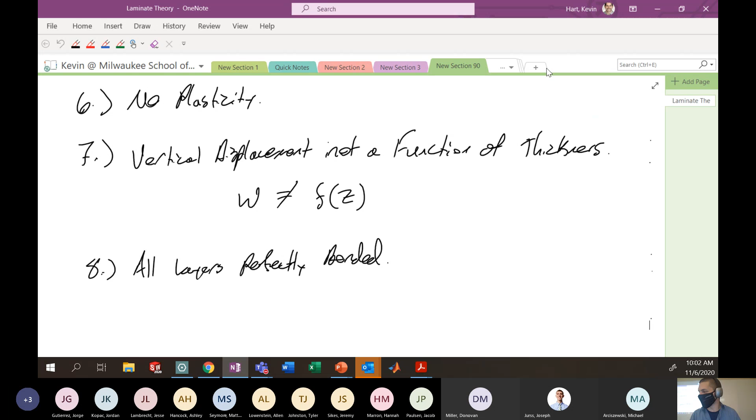No plasticity. No, just kidding. Different class. All right. So we were talking about fatigue and endurance curves. But before I get into that, I want to talk about the lab you just turned in very quickly. So quickly, an aside.

Okay. And this is from the non-circular torsion lab. All right. So your non-circular torsion lab, you should have seen that when you're doing the calculations for this sort of like rectangular cross section, we know from the non-circular torsion portion of the class that shear stresses will be highest in the cross section of bar at like these general locations. All right. So in these particular spots, you'll have like the maximum shear stress. You should have seen that like the error for the modulus calculation on this side of the bar that you had like some high error. I think it was like 28% was approximately the right number. All right. On this side of the bar, your error was lower. It was like 3% or something like that.

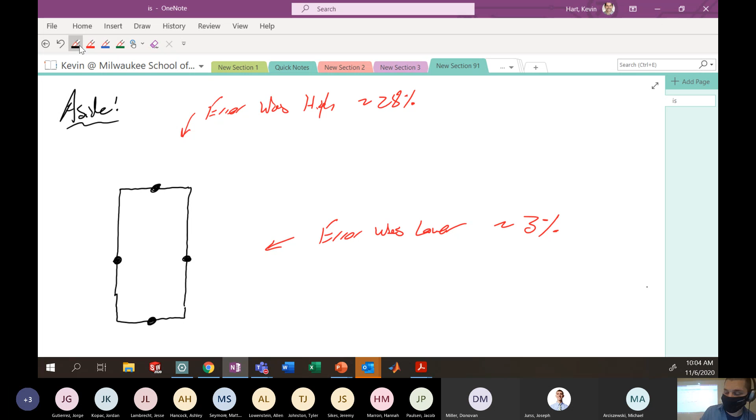Okay, approximately. When you're calculating the moduli for your lab. Now, we know from our lecture of non-circular members and torsion that we're going to have like the max shear stress sort of on this like center of like the long sides, the center of these like sides of the bar. We also know that at like the edges here, these corners, your shear stress is equal to 0. All right, for all these 4 corners. Okay, so the question is, why was the error so high on the short side, but the error was so low on the long side? I had a lot of very interesting responses, most of them incorrect. Okay, so let me explain why that would be.

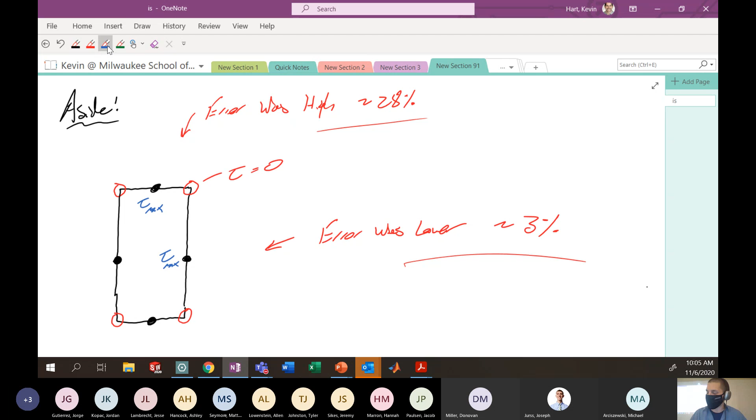All right, so if we think about what the distribution of the shear stress might look like on these sides of the bar, it's going to look something like this, where if you have some maximum value that's like up here, it's going to sort of taper off to the edge. It looks sort of something like this. Okay, that's going to be what your distribution generally looks like. Same thing on the long side of the bar. All right, it's kind of coming up like this, and that's not a very good drawing. That's a little bit more appropriate. All right, where it looks something like that. This is your distribution of the shear on either side of the bar as you're looking at the bar. The question was, why is the error so high on this top side of the bar? And many people came up with ideas, but most of the ideas were sus, as they say.

What is it? Among Us. Yeah, okay. Very sus. All right, it's like they're stealing my word. Very sus. All right, suspicious.

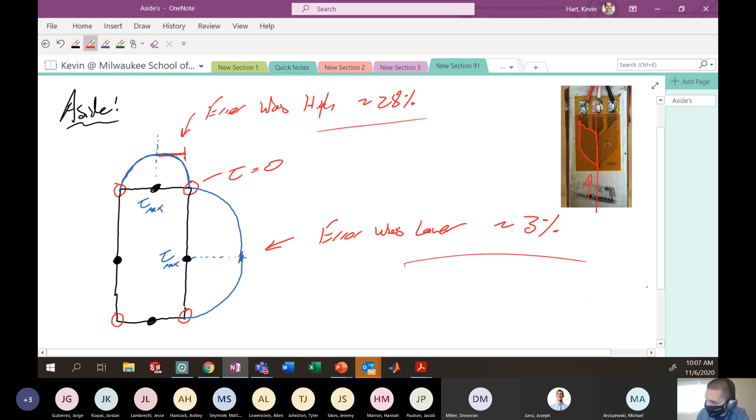All right. So when I think about this particular picture, let's see if I can bring this in here. Is it going to blow everything up? No, it's not blowing everything up. What I'm saying here is that this gauge is occupying so much real estate on this particular side of the bar. So what do I mean by that? Well, I'm basically measuring the shear strain over this whole region of the bar. Same thing, I'm measuring the shear strain over this whole region of the bar. On the longer side, I have a similar idea, except it's much less of the total length of the cross section. So here's the general idea.

When I'm measuring with this shear T rosette on the top side of the bar, I'm basically taking the average of this portion of the distribution and the average of this portion of the distribution, and that's basically the shear stress that I'm reading. We see here that because the gauges have such a wide width, the real value of the shear strain on the far edge of that gauge is relatively small. Maybe it's only 50% of the maximum value. Same thing on this side over here. It's maybe only 50% of the maximum value.

So I'm trying to measure the shear at the center of this particular bar, or I've assumed that I know what the shear stress is at the center of the bar with this calculation, tau max. But because of the width of this strain gauge, I'm actually measuring significantly less strain at that point than I would expect. So generally, I might get some portion of my strain reading that is significantly less than what is actually happening at the center. That's different from the long side of the bar where, yeah, I'm measuring some amount, but generally that amount is equal to the maximum. That's just because these shear T's take up so much width on the top side of the bar.

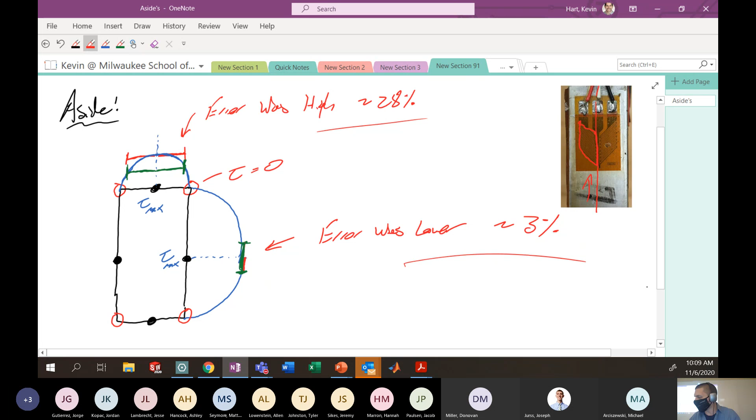And so the explanation here for why the error is so high at the top has something to do with the measurement that we're taking of the shear strain on the top side of the bar. The distribution of the strain on the top side of the bar is such that because of this displacement of the gauge off the center, we have a significant error because of its displacement off of the center of the top of the bar. It's amplified on the top side of the bar as opposed to the long side of the bar, because the amount that the gauge is displaced off of the center, percentage-wise, on the long side of the bar is much less. So hopefully we see and understand that.

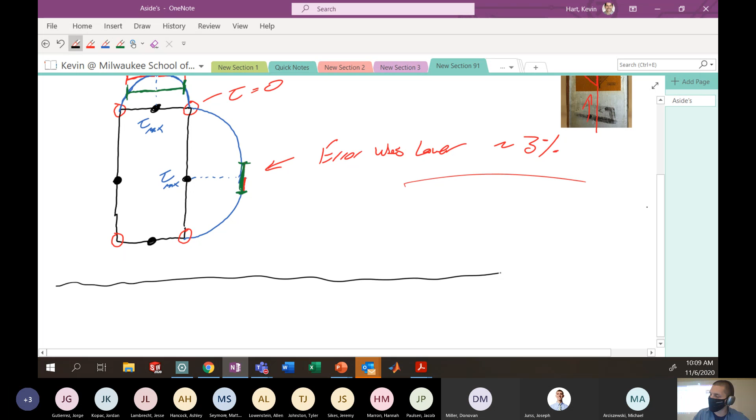That was the correct explanation. Some people were dancing around that idea, but you had to say something like the distance the gauge is displaced from the center of the side is significantly more on the top than it is on the side. That was more or less the right explanation. Okay, rant over. Let's get back to fatigue.

Are you fatigued by my explanation? Okay. What's that? He's enlightened. Oh, that's good. I'm glad he's enlightened and he's not fatigued. But let's get back to fatigue, and I hope you're not fatigued by it.

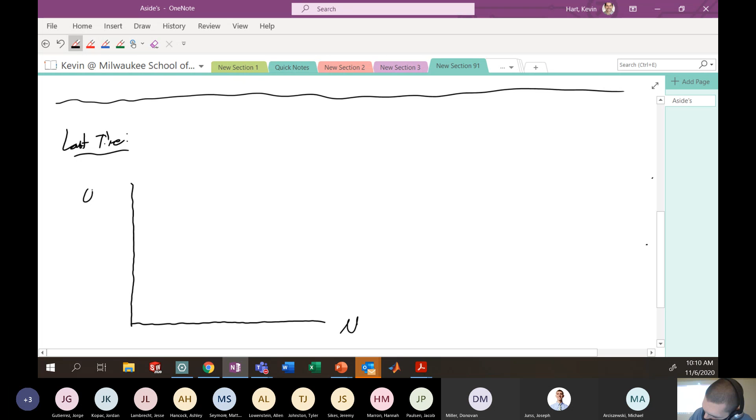Okay. The last time we were talking about endurance curves and modifications to the endurance limit. So last time we were talking about endurance curves, which more or less is plotting on the y-axis. This is an endurance curve.

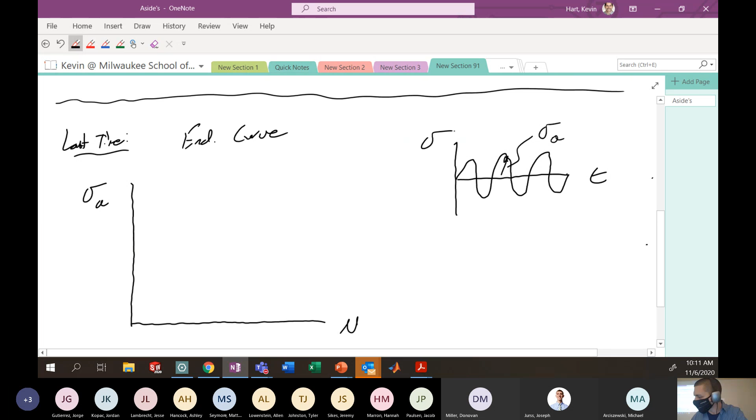The stress amplitude that we can handle. Reminder, this is sort of like the time, and here's our stress distribution that we're assuming. Just a reminder that your stress amplitude is this value, assuming the cyclic distribution.

We're varying the stress amplitude and saying how many cycles to failure do we expect. If we're failing with 0 cycles, we're at the ultimate tensile strength, SUT. Some portion below that, we have the yield stress, which we're calling in fatigue SY. And then there's some low value of the stress amplitude, which we're calling SE, the endurance limit. The idea is that as we lower the stress applied to our piece, we get more and more cycles to failure. It looks something like this in general.

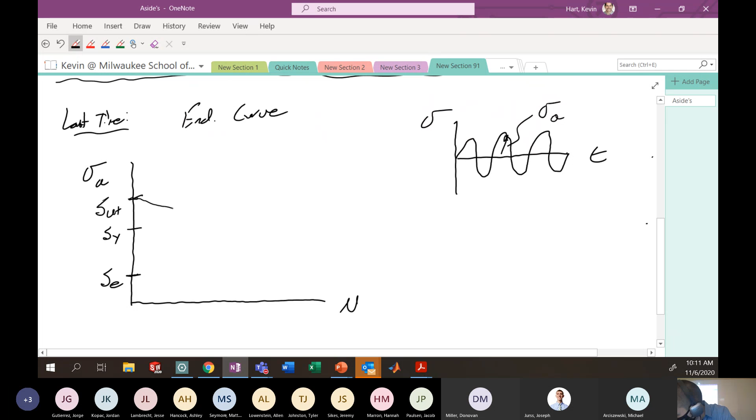This is called our endurance limit, usually around 1 million or 10 million cycles. The idea is this endurance limit, SE, is the stress that you could theoretically apply to the piece infinitely many times and it would never fail.

So if we're designing a piece and want it to quote unquote never fail in fatigue, this would be our design criteria. We'd want to design towards this endurance limit if we're expecting unlimited or infinite cycles applied to our piece. This particular curve is made for a variety of materials, and it looks different for each material.

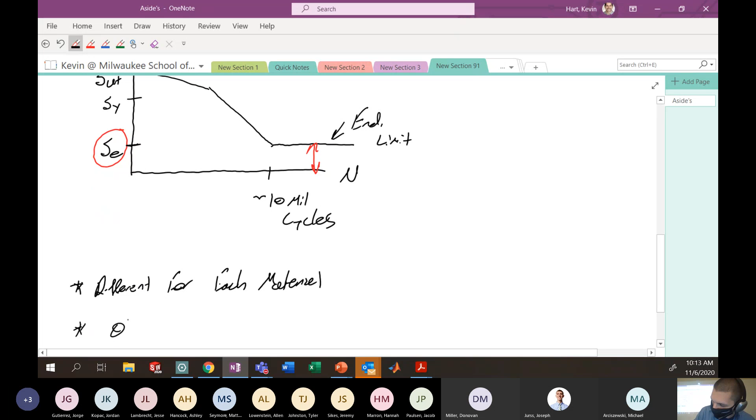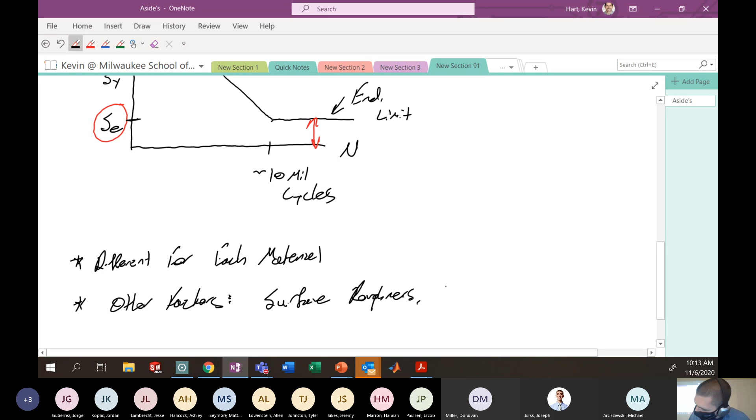Not only is it different for each material, there are other things that can affect how this curve takes shape, such as surface roughness, surface area to volume ratio, and applied load—could be axial fatigue, bending fatigue, or torsional fatigue. So the applied load matters, surface roughness matters, surface area to volume ratio matters, maybe temperature matters. All these things can affect what this curve looks like.

Maybe this is your curve for a pristine specimen, but what if the temperature is 100 degrees Celsius less? Well, maybe your curve looks something like this. Who knows? So now if you're operating at a lower temperature, you have some new endurance limit, which is some SE modified.

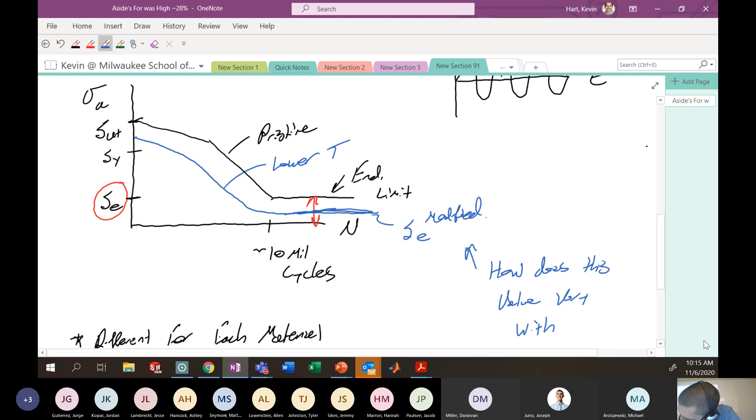Some modified endurance limit that you now want to protect against. So what we want to do over the next lecture is say: if we're operating at a different temperature, a different surface roughness, a different size specimen, or a different loading type, how does that affect our endurance limit? How does this value vary with all of these parameters—surface roughness, surface area to volume ratio, applied load, and temperature? That's what we're going to talk about in this lecture.

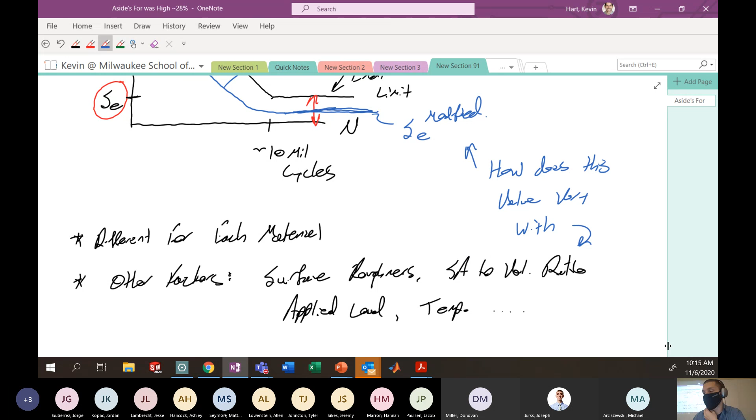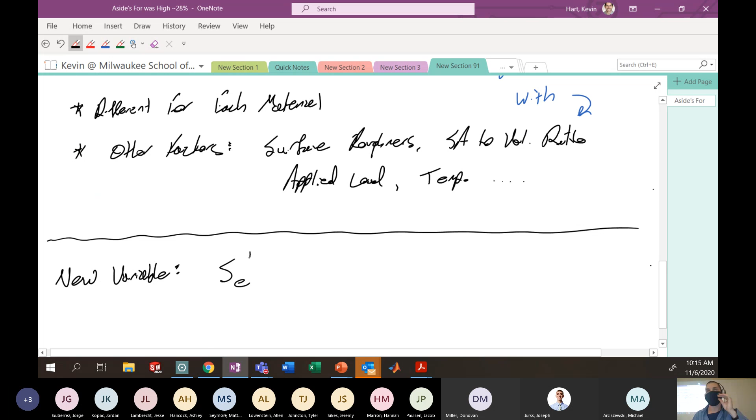So we'll introduce a new variable here: SE prime. SE prime is the pristine endurance limit. What I mean by that is the value that you get from the R.R. Moore high-speed test.

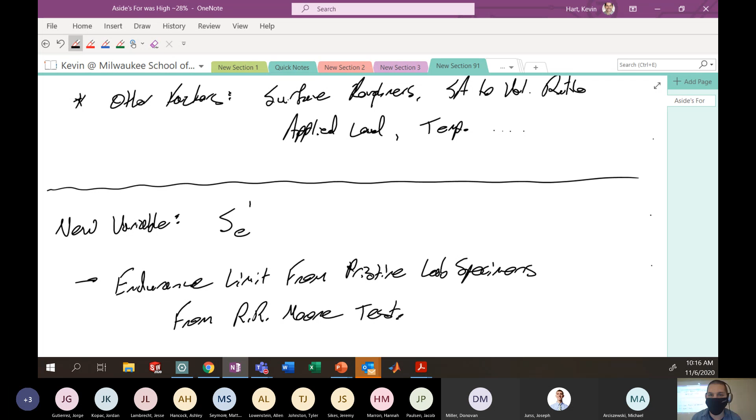This is a very standardized test that must be done to establish what is this pristine baseline. All the samples that have this pristine value coming off are the same size, they have the same surface roughness, they have the same character of applied load. Everything about the pristine endurance limit is very controlled.

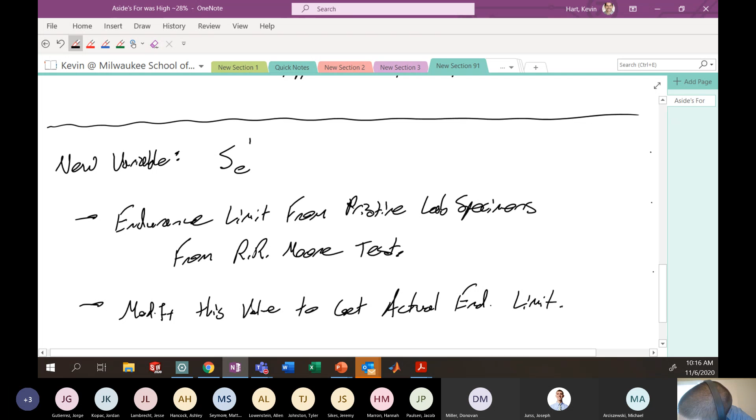Then we modify this pristine limit for our certain situation based on temperature, size, applied load, etc., to get what our actual endurance limit is. We do that using endurance limit modification factors.

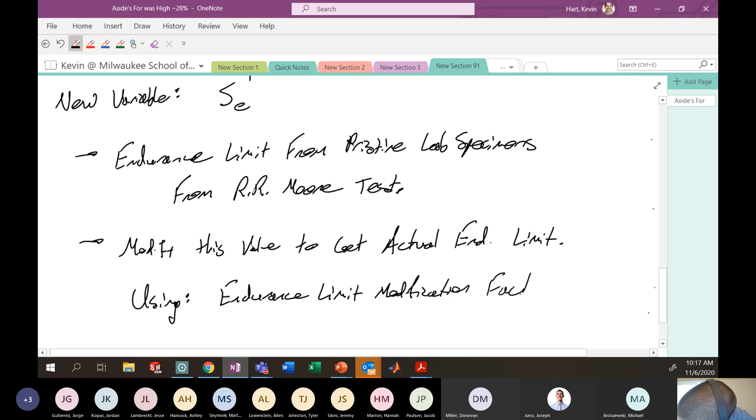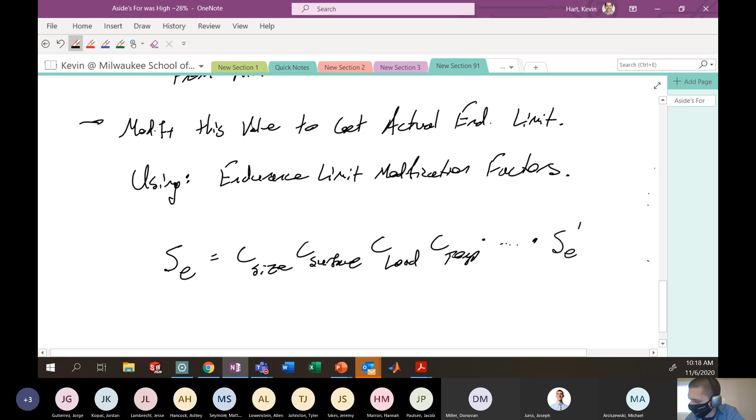The basic equation you'll see for endurance limit modification factors is something like the following: SE, your actual endurance limit given your particular situation, is given by C size times C surface times C load times C temp, times whatever other variables might affect your situation, multiplied by the pristine endurance limit. So this is your actual endurance limit, these are your modifying factors, and this is your pristine endurance limit.

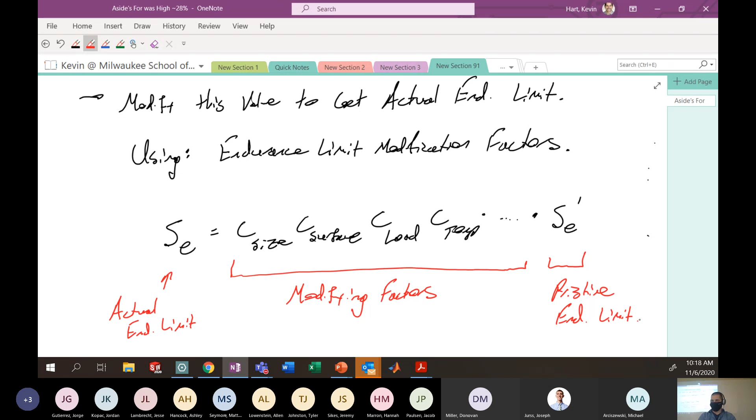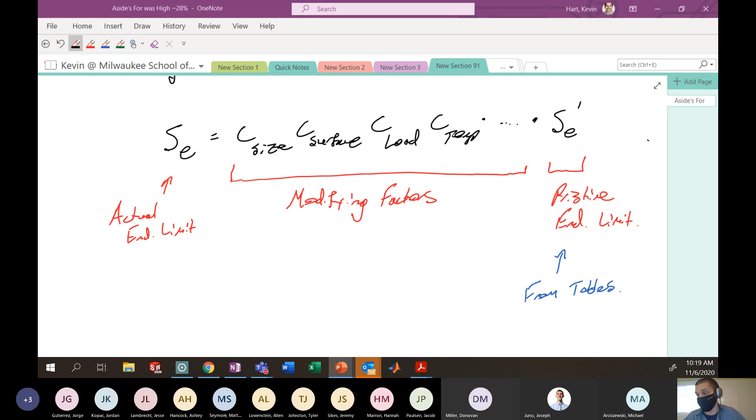So let's actually talk about what these endurance modification factors are. All of these modifying factors come from experiment—they all derive from empirical methods.

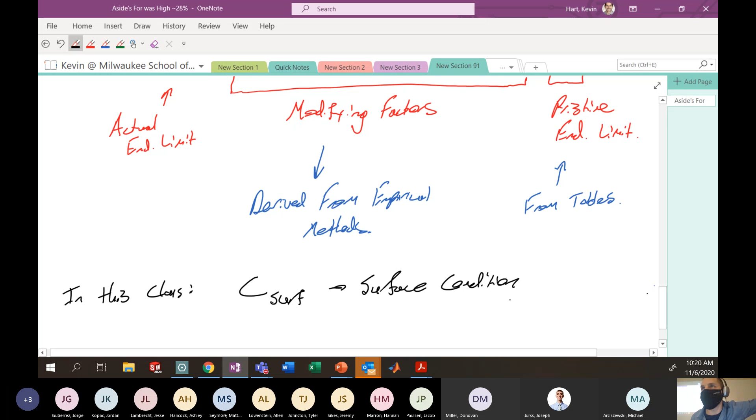Okay, the only ones we're going to talk about in this class are surface condition modification. So CSURF, which is surface condition. The rougher the surface is, the lower the endurance limit will be, just because you have more flaws from which to propagate cracks.

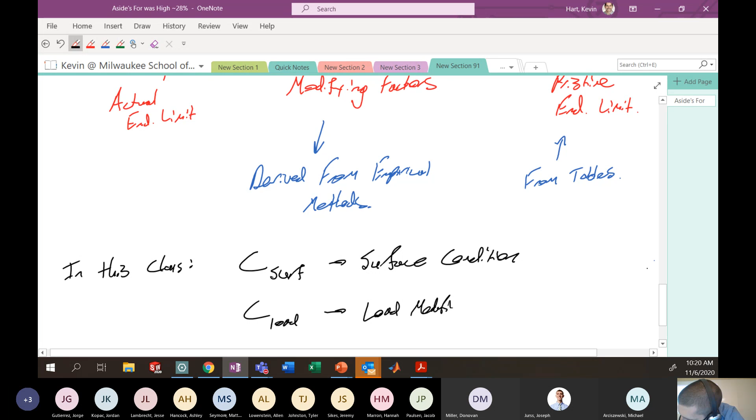We're going to talk about load modification, so this is C load. This basically is a factor that tells you how things change, whether you're doing a tensile loading, a bending loading, or a torsional loading.

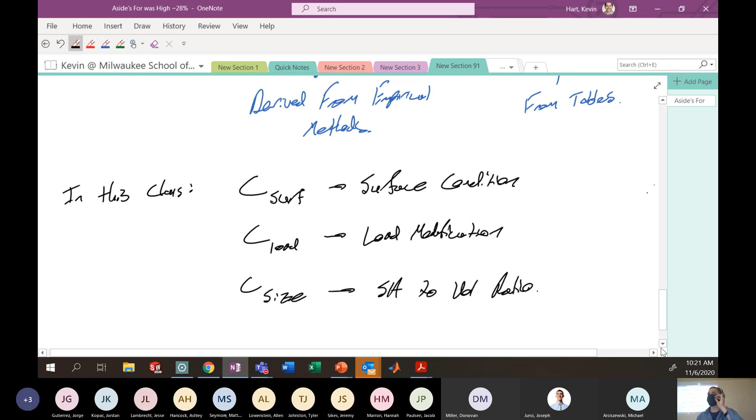The last one that we're going to talk about — not temperature, that one's really quite complicated — is the size modification. And this really has to do with the surface area to volume ratio. The more surface area you have to volume ratio, the higher your likelihood for flaws to affect the ultimate performance.

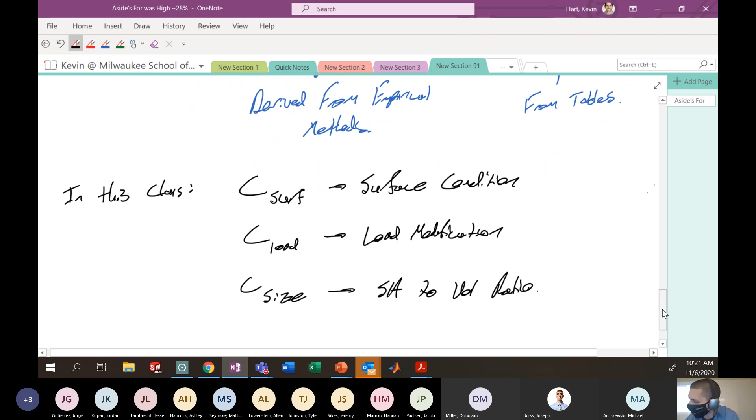If you have a very high volume and a very low surface, that means most of the load is going to be carried by that internal volume, and your proclivity to have flaws that propagate cracks on the surface is very low. But the more surface area you have, the more possibility there is for a flaw to exist, which limits your ultimate performance. That's the idea.

So there are analytical models for each of these, and we're going to tackle them one by one. The first one we want to do is surface modification.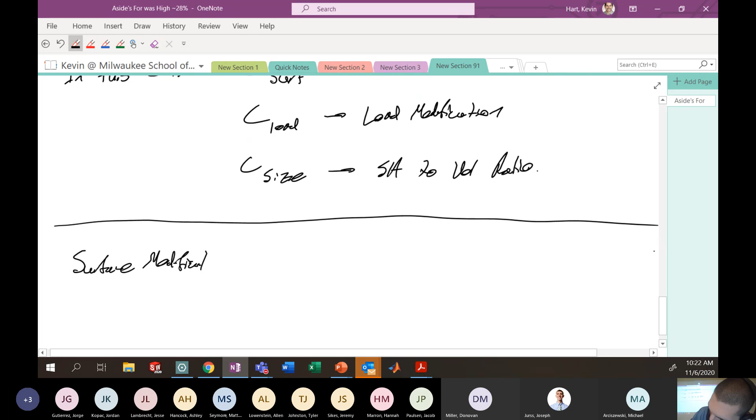More flaws leads to earlier failure. Pretty simple: the rougher the surface, the more flaws.

So basically the idea here is that we want a model that captures the basic idea of how much roughness affects the ultimate performance. The general formula here is this: the surface modification, C surf — I think in the notes I use K, your book uses the variable K instead of C, your equation sheet uses C, so I'm going to stick with C here — equals a constant A times SUT, the ultimate tensile strength, to the B. This is your general formula for surface modification.

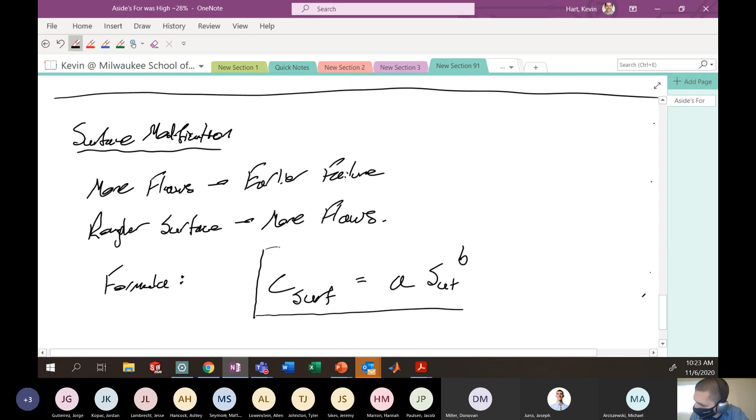SUT, this is your ultimate tensile strength. A and B are constants that depend on the surface roughness.

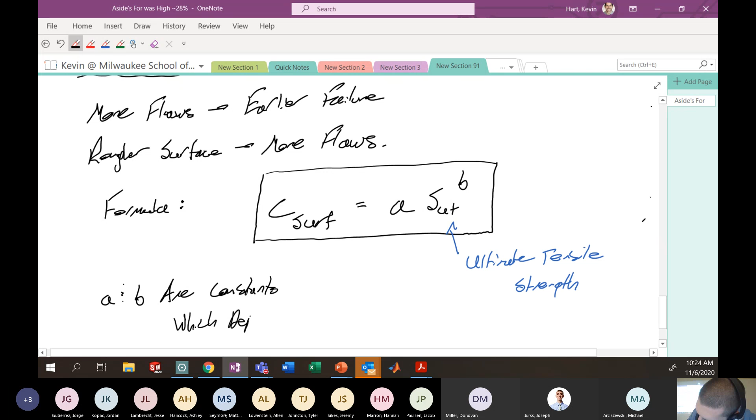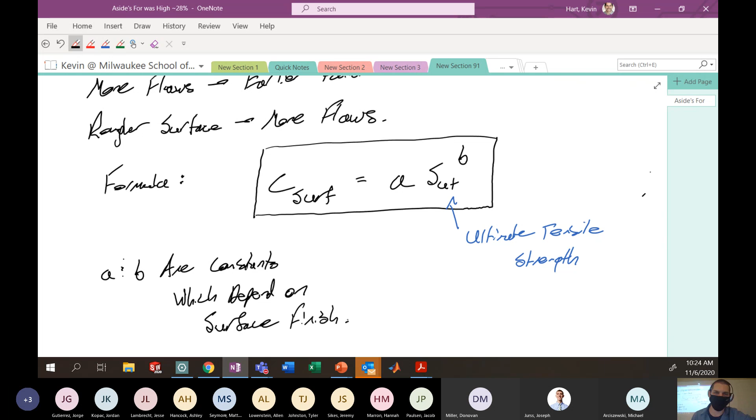I'll say surface finish. There are many tables that exist that tell you, if I have a milled surface, what's my value of A and B; if I have a hot rolled surface, what's my value of A and B; if I have a cast surface, what's my value of A and B. I've included the one from your equation sheet and the one from your book in the notes, and I'm just going to post that here. But there are many other values aside from this that exist.

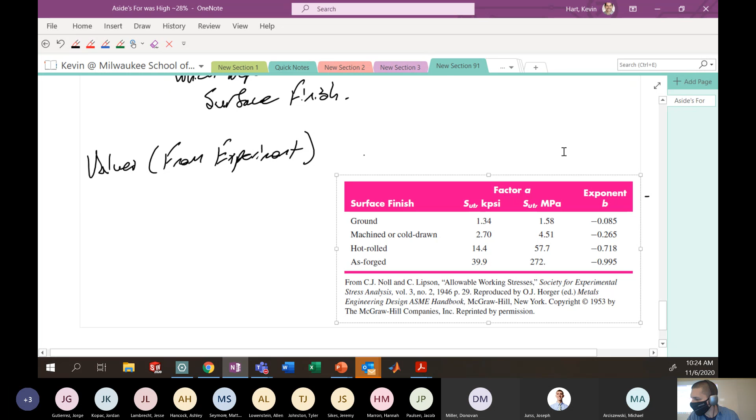And again, this is strictly from experiment. It looks something like this — just move this up... oh god, it's a disaster, okay whatever, stupid technology. So here are your values, from experiment, and these are tables in your notes.

So this factor A — I'm Canadian — this factor A depends on whether you're working in English units or standard units, so be careful with that. But the exponent B doesn't matter whether you're in English or standard units. Various surface finishes give you certain modifications.

Last thing I'll say is if the surface is pristine, then the surface modification value is 1, obviously. Your endurance limit will be equal to the pristine endurance limit if your material's surface is pristine. Otherwise, get thee to this chart.

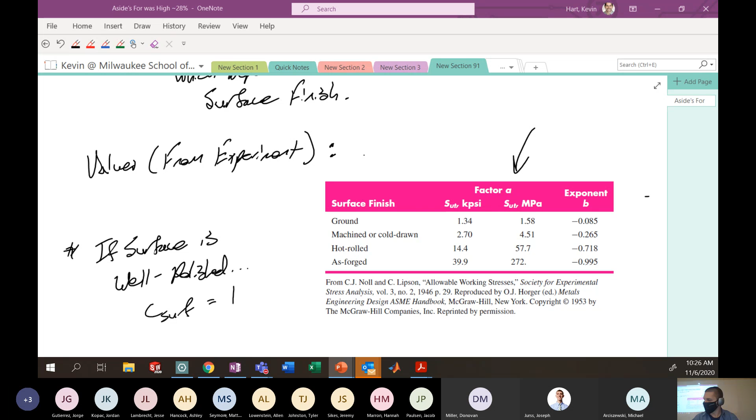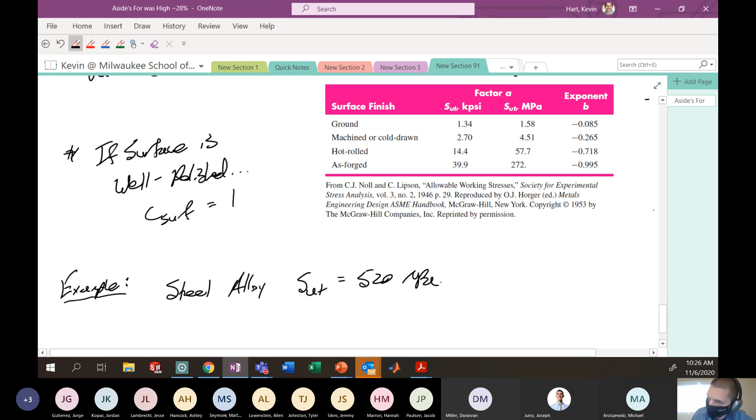All right, let's look at an example. Let's say we have a steel alloy, tensile strength 520 MPa, and let's say it has a machined surface. We'll find what is our endurance limit, and we're going to assume that it otherwise has the geometry of the R.R. Moore specimen and is in bending.

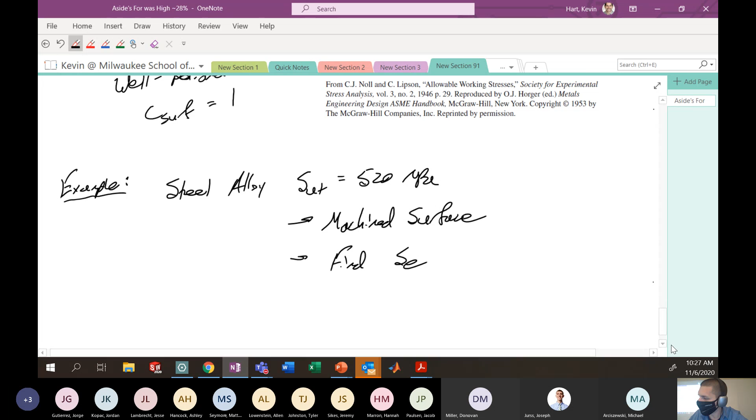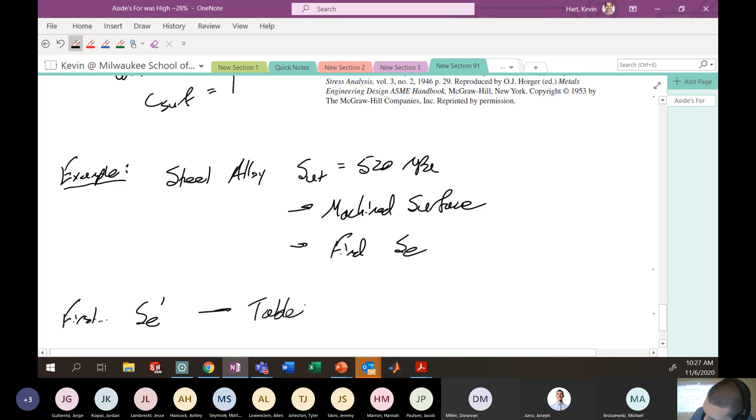So first what we want to do is find the pristine endurance limit for this piece, and that comes from the tables. As a reminder, let's go back to our tables — this is the table in your particular equation sheet. Here we're told that this particular steel has an ultimate tensile strength of 520 MPa.

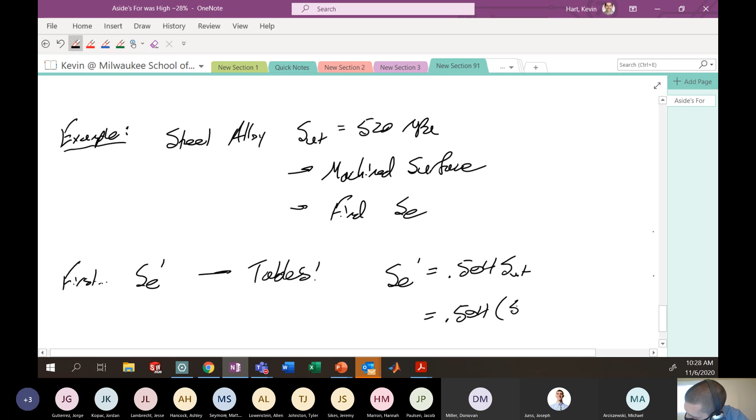So obviously we're not greater than 1460, we're less than 1460 MPa. So our general equation to figure out the pristine endurance limit is 0.504 times the ultimate tensile strength. So SE prime is 0.504 times the ultimate tensile strength, times 520 MPa, giving us the pristine endurance limit here, which is 262 MPa.

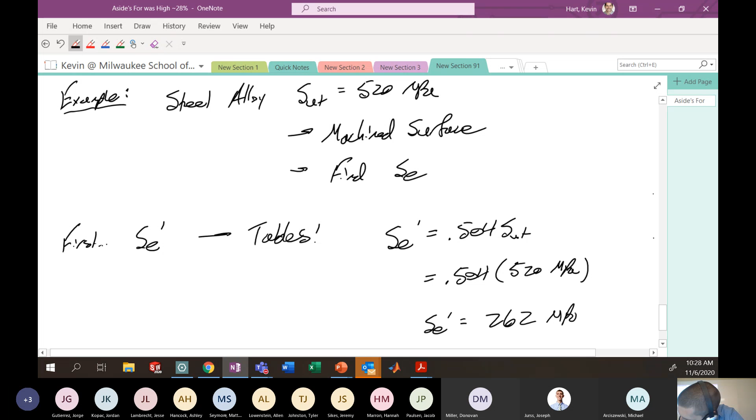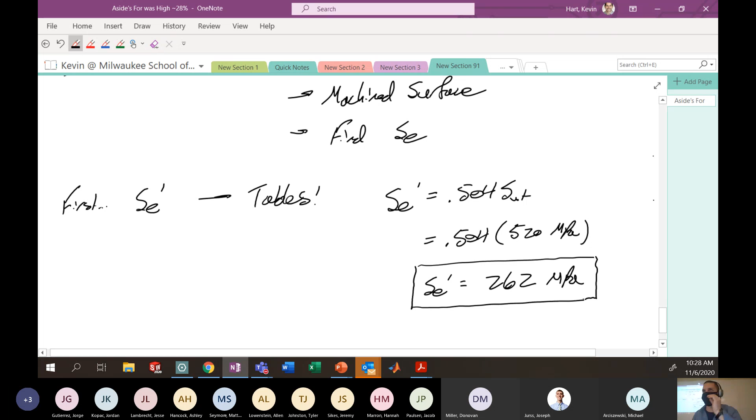Okay, this is our pristine value. We have not yet modified for surface finish. This would be what the endurance limit would be if the surface was perfectly pristine. Okay, now I need the surface modification.

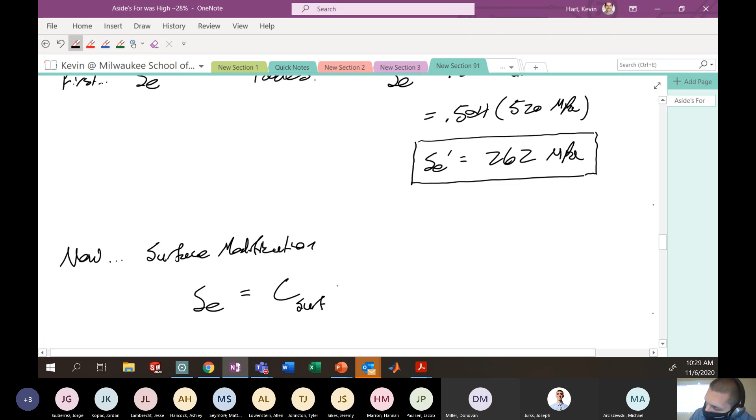So the general formula I'm going to use here is that my modified endurance limit is the surface modification value times the pristine value, where this C surf is equal to A times SUT to the B.

For machine finish, we can go to our table to get the values of A and B. Give you a second to catch up. Keep in mind that we're working in standard units here. It's going to be important when we go to the table for our value of the constant A.

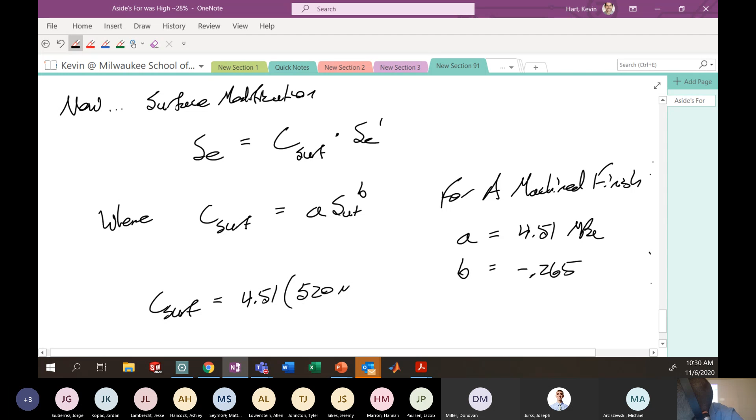All right. So for a machined or cold drawn surface, we take a value of A, if we're in metric, of 4.51, and our exponent B is negative 0.265. So for machine finish, your value of A is 4.51 MPa, and your value of B is negative 0.265. Okay, it's my exponent. Okay, so then C surf is equal to 4.51 times my ultimate tensile strength, which I know here is 520 MPa, to the B, which is negative 0.265.

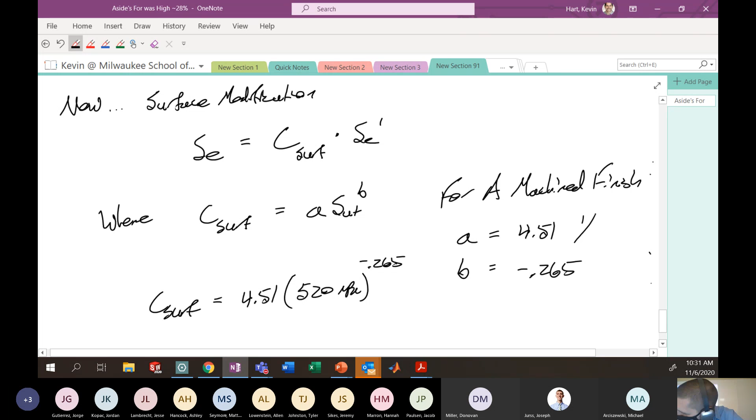Yeah, there's a problem with this chart. This variable A should actually be 1 on MPa. It's actually 1 on MPa to the b, which is a little complicated, but just roll with it. All right, so we calculate all this out, and you're going to find that your surface modification is 0.860.

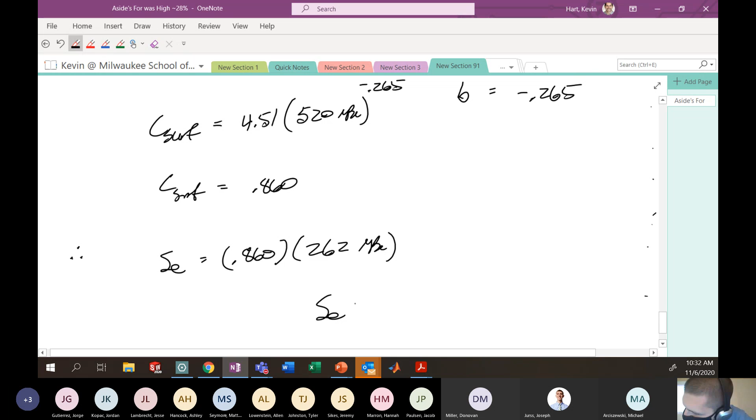All right. So because of this particular roughness that I have, I'm going to reduce the pristine endurance limit to 86% to get my actual endurance limit. That's just because the increased amount of flaws on my surface leads to a higher proclivity for failure before the predicted endurance limit. My surface modification times my pristine value, which was 262. And so your actual endurance limit for this particular piece is 225 MPa.

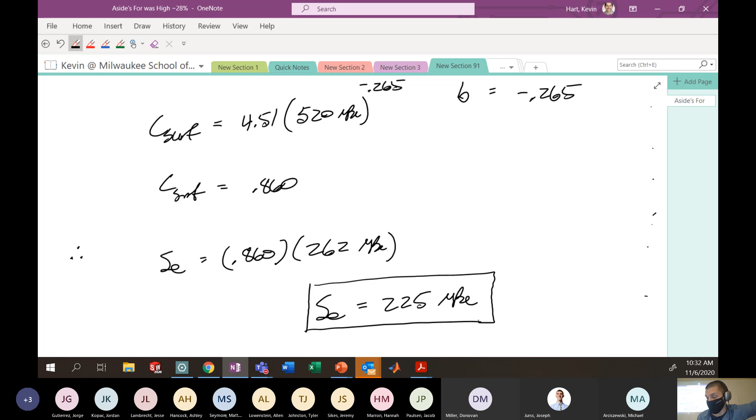So for this particular piece, if I wanted to design against infinite cycles to failure, the stress amplitude that I would want is less than 225 MPa. Anything more than that, you would ultimately fail at some high level of cycles depending on the amplitude. All right, that's the general idea. Okay, so that's your surface modification. Next modification we want to talk about: size correction.

All right. The RR Moore test assumes a circular specimen of a certain size, but you're not limited to circular specimens. I mean, in the real world, you use rectangular, triangular, whatever. You've got a lot of different cross sections that you could use, and also you're not limited to whatever the size is of the RR Moore test. You could have a circular round of whatever diameter. It doesn't really matter. But the point is, as you change your size, you will change the surface area to volume ratio. And you need to be able to account for that because the more surface area you have, the more flaws you have. Okay? So, size correction factor.

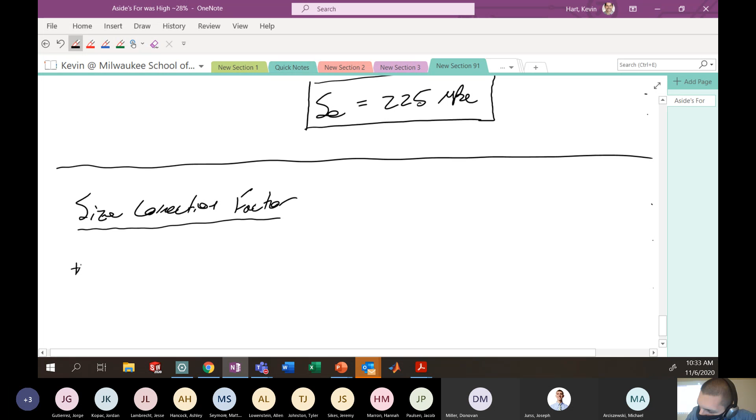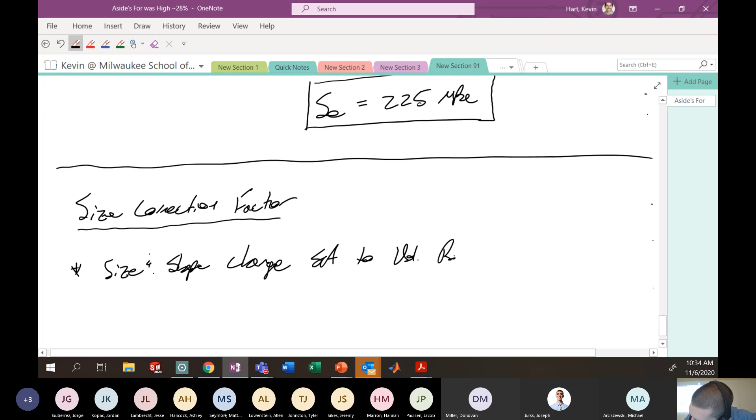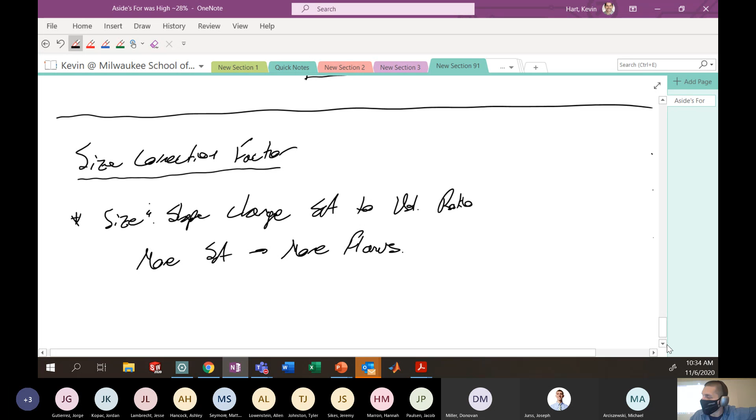Size and shape change the surface area to volume ratio. More surface area leads to more flaws, or more truthfully, more flaw density per volume. All right? So that should lower your endurance limit. So the size correction looks a little strange, a bit complicated, but let's talk about it. Generally, you're going to use the variable C size. And the calculation of C size depends on the hydraulic diameter.

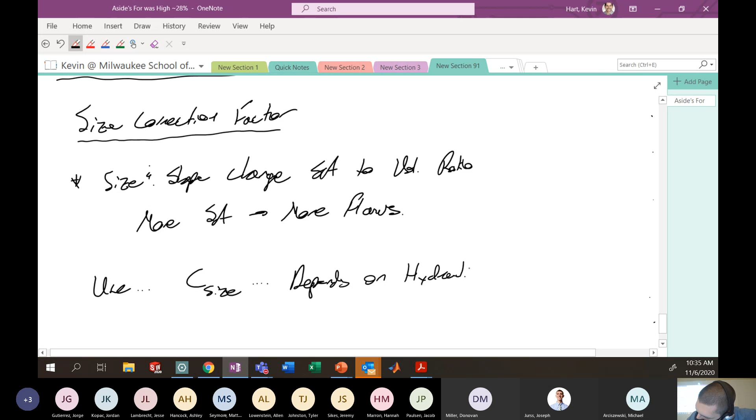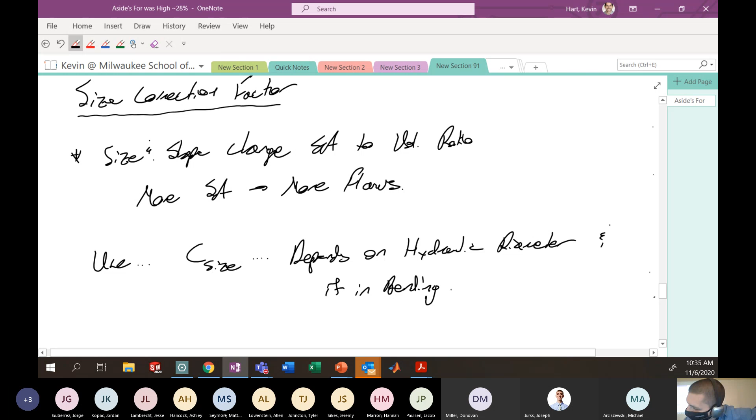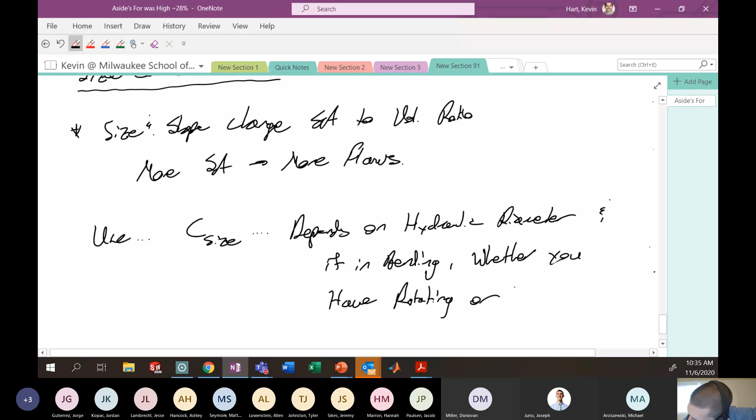And if in bending, whether you have rotating or non-rotating bending. Let me explain. We need to talk about rotating bending.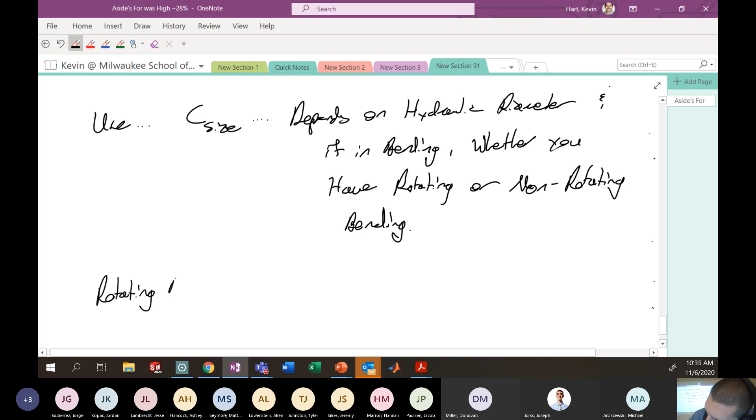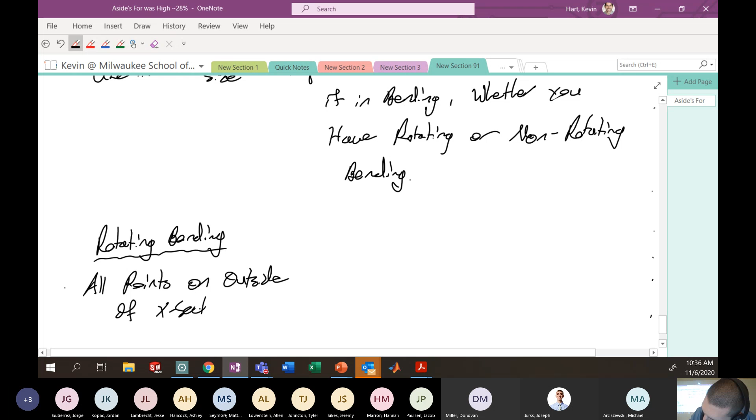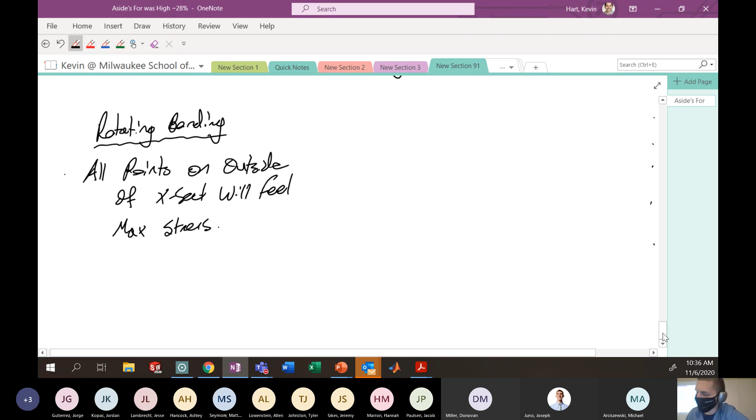Okay. In rotating bending, all points on the outside of a cross section will feel the maximum stress. The R.R. Moore test is an example of this. This example with this particular bending specimen that we sort of talked about already. If you're on some axis here and you're rotating with some motor, and this thing is in 4-point bend, okay, so this thing is spinning around. All the points on the outside of this cross section will ultimately feel that stress amplitude.

So at this particular snapshot in time, yes, the top is in compression and the bottom is in tension. But since the sample is rotating around, every single point on that red circle that I draw on that sample is going to, at some point, feel the maximum compression and feel the maximum tension. Okay? So that's what I mean. All points on the outside of the cross-section will feel the max stress. That's because I'm spinning this around in this 4-point bend configuration, so every time it rotates around, every point experiences the maximum compression and the maximum tension.

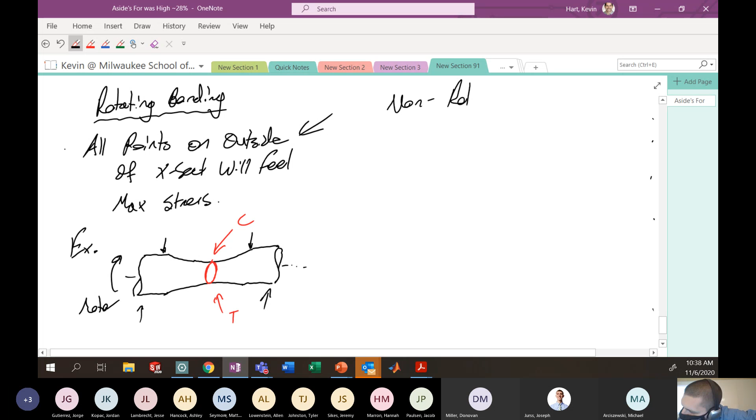That's different from non-rotating bending. Only 2 points feel max stress. In non-rotating bending, instead of spinning a sample around some axis, where all points are going to feel that maximum stress, basically what you're doing is taking your sample and doing this. Okay? No longer is every single point experiencing the maximum stress. It's only the points on the top and the bottom of this cross section that are going to feel the maximum stress. So you could think of this round specimen again if you want. This could happen in a round.

Okay, where no longer am I spinning this around a motor and holding it in 4-point bend, but instead I might be having some alternating positive and negative bending moment fluctuating in this way.

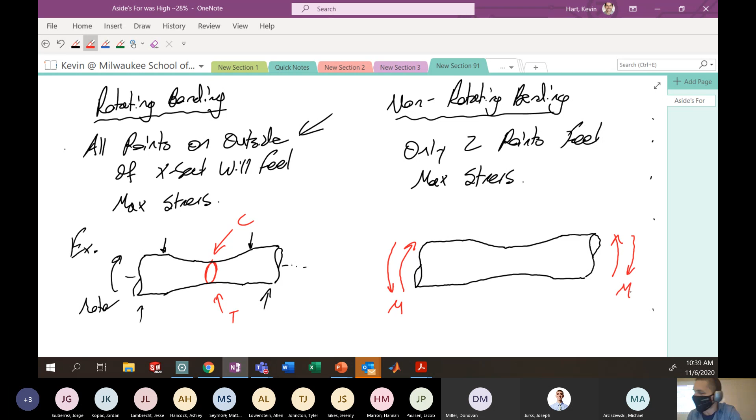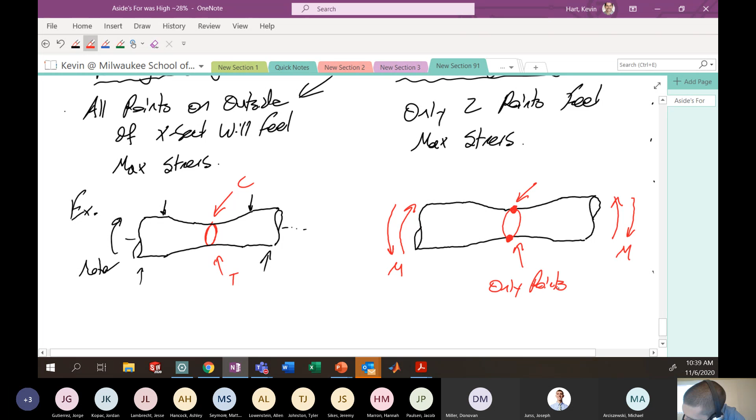In this particular situation, yes, you have this cross section occurring here, but you're only experiencing the maximum stress on this cross section at the top and at the bottom. So these 2 points are the only ones experiencing the maximum compressive and tensile stresses. That's different from rotating bending, where all of these points are experiencing that maximum value.

So in a non-rotating bending situation, you're only looking at these 2 points as possible failure points, basically the top and the bottom of the cross section. If those are very pristine, perfectly polished, no flaws at that location, it's going to last for a pretty long time.

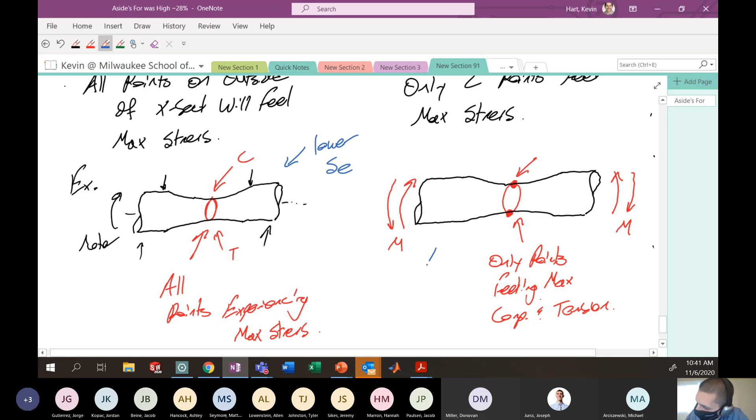But as you begin to test all points on the outside of the cross section, the probability that you run into a flaw is much higher. So the probability of this failing before that is greater. With equal moments applied, all things considered equal, this will have a lower endurance limit. And that's because you're more likely to expose a flaw when you have rotating bending.

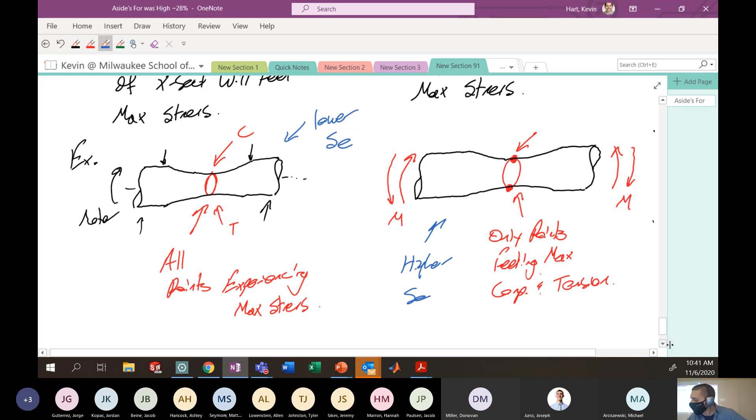For instance, in this non-rotating bending, if I had a big flaw right there at that blue dot, that's my neutral axis of bending. There's no stress happening at that point. So I'm never going to prematurely fail because of that flaw, since it's never loaded. That's how you've got to think about this.

So we need some size modification that accounts for this unique behavior of rotating versus non-rotating applied loads. Okay, enough ado.

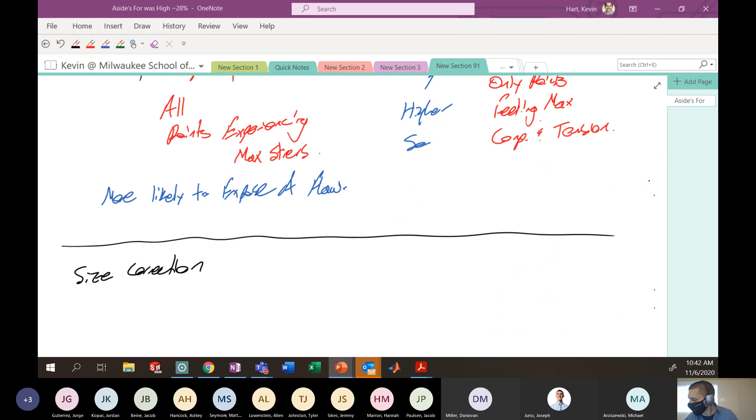Size correction, the following. This is in your notes. Here's what the equations actually look like. Some for standard units, some for metric. Obviously these are standard... sorry, English. This is standard.

The idea here is you calculate the size modification according to this equation if the diameter of your piece is between 0.11 and 2 inches. You'll use this equation if the diameter is between 2 and 10 inches. If it's outside of that, you need a new table. Everything we do in this class will be somewhere in the range of this chart. So these are the equations that you have.

Well, what's D? This D is actually DE, which is this value here. It's the effective diameter, or what's known as the hydraulic diameter. The effective diameter is something you calculate for your cross section, and if your cross section is not circular, you have to come up with this effective diameter value.

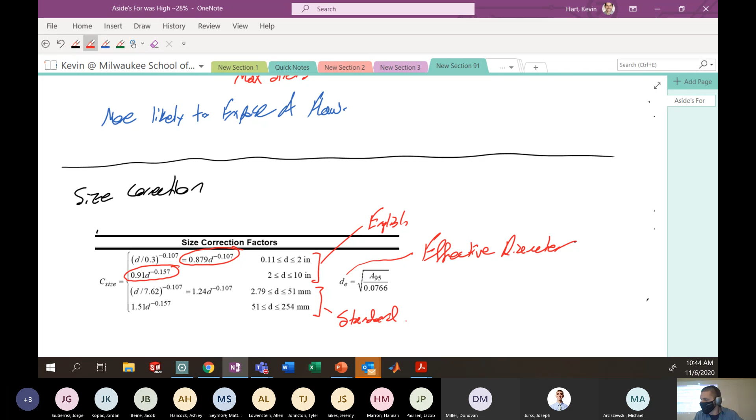And it's calculated with this A95 variable, which is a statistical variable that we're going to talk about in a second. And it depends on the cross section that you have.

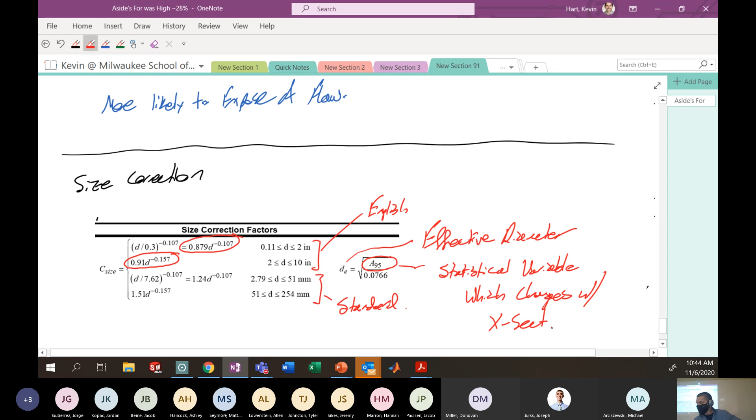The A95 variable, there are tables given for that as well, also in your equation sheet, which looks like this. Here's how we calculate the A95 variable.

And we have a situation of rotating and non-rotating bending, just as I explained. So here, if you've got a circular cross-section with a certain diameter, if you're in rotating bending, take this calculation. Notice that this would simplify, based on the equation up here, to just a little d.

If you have a square or rectangular cross-section, you can calculate your A95 as 0.05 times base times height, doesn't matter if you're rotating or not. That A95 value gets fed in here, and you can calculate your effective diameter, which then gets fed into your size correction factor. Got some weird ones here for I-beams, C-channels. We're loving C-channels after that last homework, right? Sus. Okay, so you get the general idea, that's the method.

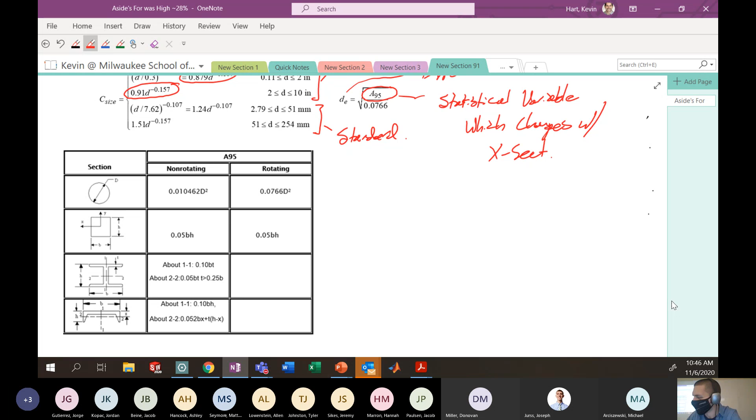Try not to get too caught up in election coverage, it's a little psychopathic at the moment. Happy weekend, see you on Monday.